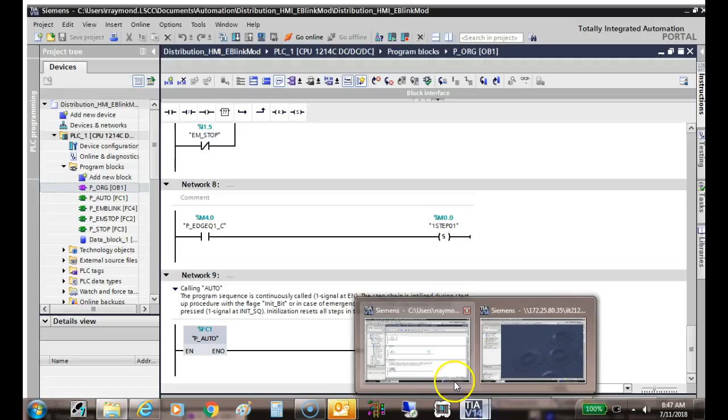So what's neat is, since this type of file has been associated with TIA Portal, all you have to do is go into your folder, find your last one, double click on it, and it'll automatically open TIA Portal for you. And then when it opens up, you can go directly to Program View, and it'll save you a few steps.

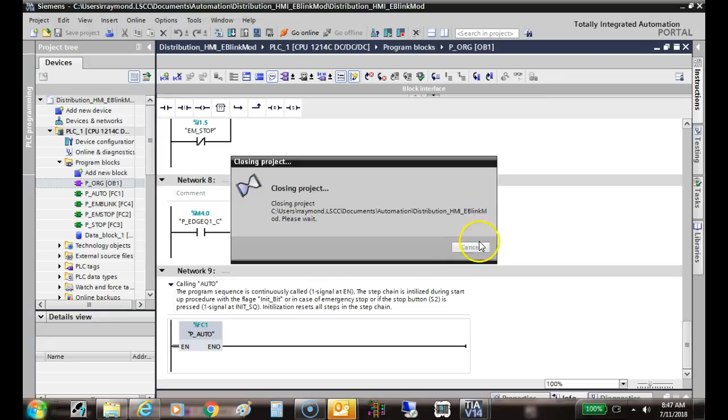What I can do is, of course, close out TIA Portal, try to anyway. So instead of me opening up TIA Portal, what I could do is come out to one of your applications, then double click on one of these folders.

And then right down here at the bottom, this is where you need to have extensions turned on. Now what they'll do most of the time is put the icon for the application that's associated with it. Y'all see this? Okay, the problem is I've got two folders — I've got two files that have the same name. One of them is a program, one of them is just something else out there.

So now I can come over to this one, which is the program, and double click on it — when we say double click, we mean double click the left mouse button. And what it'll do is automatically open up the actual application that's been associated with that file. So all it does is save me a step.

And then when I get here, it's locked, I don't have access to it. When I get here, what it does is I can just go down there to program view and do what? Yeah, portal view, and then we can pull up the application that way. That makes sense. So instead of me coming through here, it's up to you, but I could come up here and open these, but I don't have one that has timers on it.

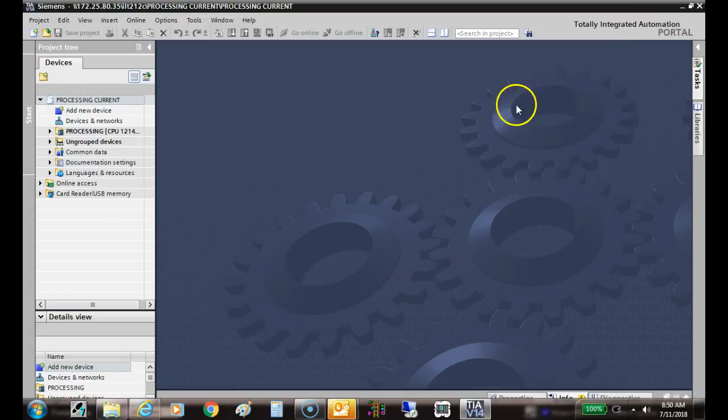So notice one of our... so it loads. Oh, I don't know, it doesn't look like it's doing what I thought it was going to do. I thought it was going to give me the option to open a file, but it's not. For some reason my taskbar won't go down. Sorry, guys.

So I'll just create a new project. We'll call this timers. And we'll also look at counters.

So on the Allen Bradley timer, it automatically gives us two coils out there, right? It gives us — what's the two coils? Anybody remember? Enable and done. We can address the enable — we can address that with timer timing, right? You understand? And then we address the other coil with timer done.

What you know right off the bat on the Siemens is they don't give you all those default coils. So what does that mean? Yeah, you have to assign them, right? You understand? But you don't have to use them. Well, you said you didn't have to use it for, right? On a timer you do, because when you use a timer, now you're thinking about the clock. I'm not talking about the clock, I'm talking about a timer.

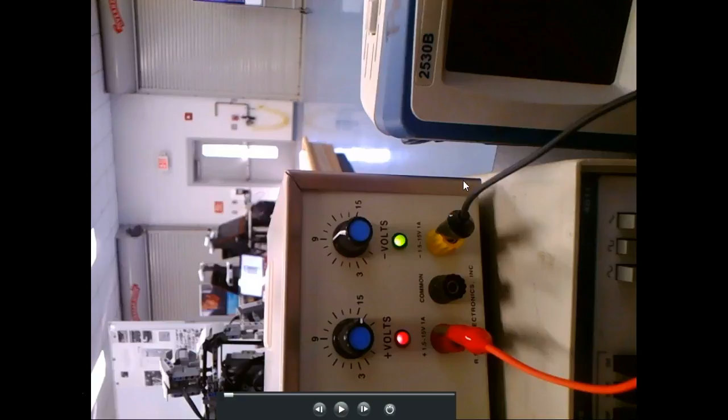Or trying to anyway. So here's something - can y'all see what I'm doing? So I'm going across. This is my positive supply, this is my negative supply. So what I'm doing, I have this one set for 15 volts, I have this one set for 9 volts, which gives me what? 24 volts. Y'all understand?

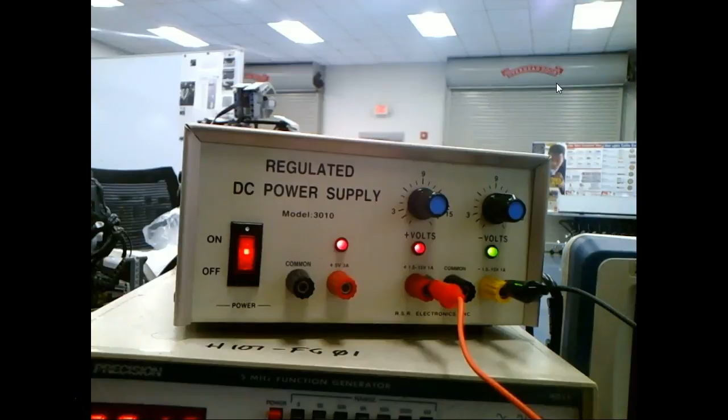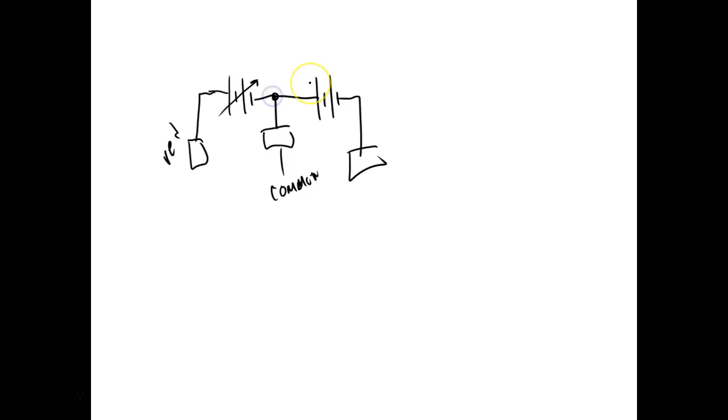So the way the trainer's wired up, if y'all went up when we did this, is the way it's done. So we have a variable power supply right here, and then it comes over here, and this is red, and then it comes over here. It's got a tap right here which they call common, and then over here we've got another power supply pointing this way, and this one is yellow, and this is variable.

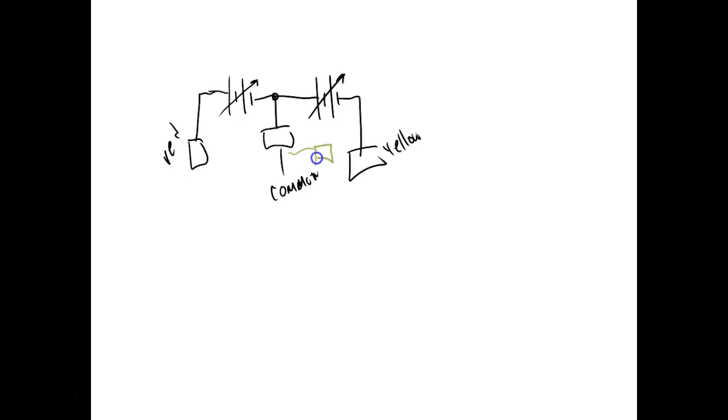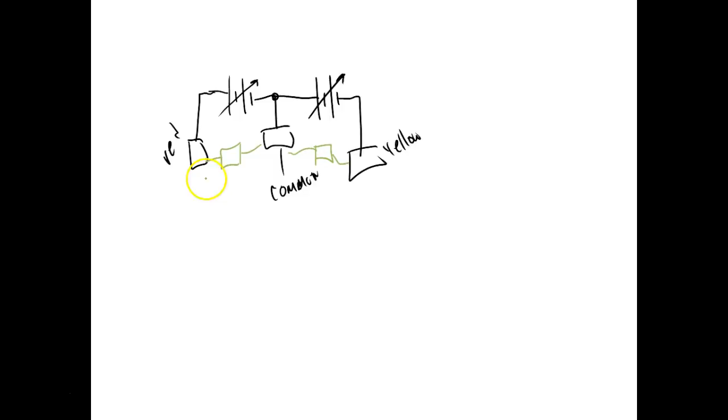So if I make a connection between here and here, then I get a negative power supply. If I make my connection between here and here, then I can adjust this and I have a positive power supply. If I make my connection between here and here, then what we're doing is we've got two power supplies connected up in what we call series. And when we connect power supplies in series, their voltages add together - and you do this all the time.

Your remote controls - very seldom do you see a remote control with one battery, right? So you put them in there... I'm not going to say what we said in the Navy, but anyway, you put them in there positive to negative, and what happens is the voltages do what?

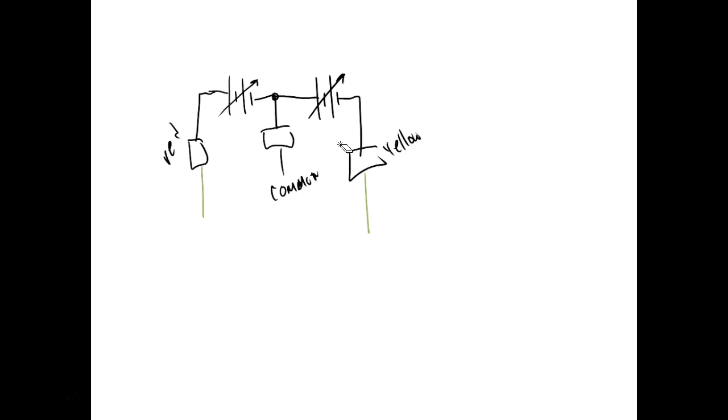They add. So we can hook DC sources, and they have to be the same, guys - if they're different, one's going to get hot and one's not going to get hot. So we can hook DC sources in parallel, and we don't change the voltage - what we do is we double the current. So if this is 50 milliamps and this is 50 milliamps, if I hook them in parallel, I don't change the voltage, I get double the current, right?

So a lot of your remotes will have two sets of batteries - put two in series over here, two in series over here, then they're wired in parallel. So we hook them in series to increase the voltage, then we hook them in parallel to get more current out of the batteries. Does that make sense?

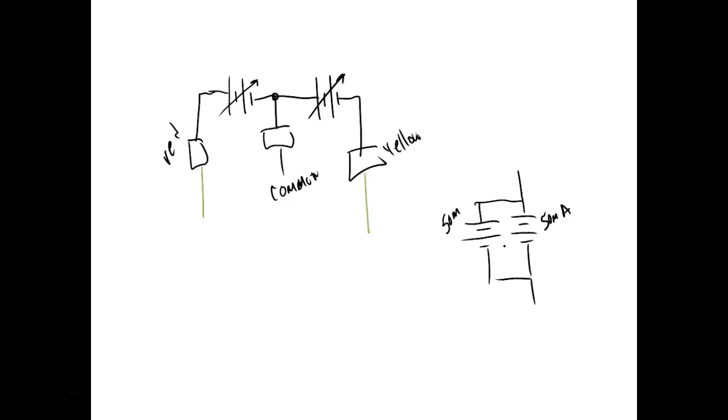So what I'm doing is I'm not using the common, and I have this one set to 15 volts, I have this one set to 9 volts, and it's the sum of the two voltages. So in parallel, you need to make sure the batteries are the same voltage level, because if one battery is 12 volts and one battery is 6 volts, then the 12-volt battery is going to see the 6-volt battery as a load, and it's going to push whatever current through that battery. And that's the way you charge most batteries.

Lead acid batteries are voltage charged batteries. They charge on a current, but what you have to do is force voltage back through them. When you force voltage back through a lead acid battery, it charges. That's why when your car's been sitting overnight, your voltmeter measures close to 12 volts, but when you crank it, it goes up to over 14 volts. Your alternator is pushing current back through that battery, causing it to charge. So with lead acid batteries, we put a higher voltage on them than what we need.

NiCad batteries and lithium batteries, we charge them at a certain current rate. These chargers are really, really small and smart, so they output a certain current. If your battery's dead and you plug it into your charger, it might only start out at 1 volt to get 10 milliamps. But as the battery charges and needs less current, your charger automatically increases the voltage to maintain a constant current. So NiCad and lithium batteries are current charged batteries.

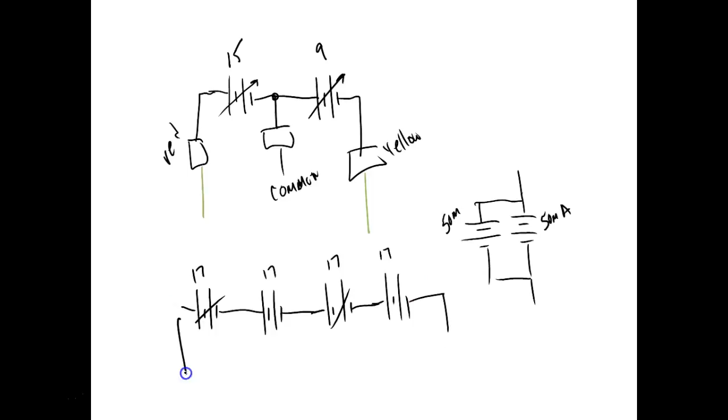This is the way I hooked up mine. We can series string these power supplies. So the other day when we did the counter EMF, all I did was take multiple power supplies and hook them in series, and I didn't even use the common. I would set this at 17 volts, and this at 17 volts, and this at 17 volts, and that at 17 volts. How many volts did I get out here? 4 times 17.

And then, of course, I started adjusting the last one. So we can series string batteries, we can series string power supplies. What's nice about power supplies is if you series string them, the voltage does not have to be the same. The voltages are additive. If you hook them up opposing, the batteries subtract from each other - it doesn't hurt them, they just subtract. That's why if in your remote control you hook one of your batteries in backwards, they subtract from each other and your remote don't work anymore.

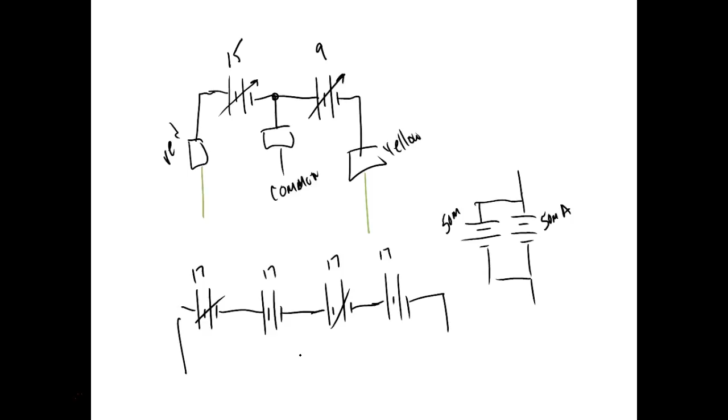So I fired up my PLC. I'm going to hook up this - well, now we can go back to what y'all learned back in DC. Didn't y'all learn series aiding and series opposing sources? You don't realize it, but you see it all the time.

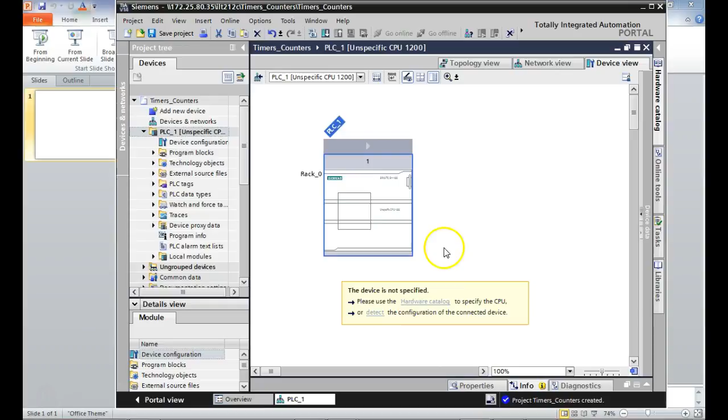So we're going to detect it now. I've got it powered up, it's went through its self-test. Most computers, when you turn them on, go through what we call a power on self-test, a POST. When you turn your PLC on, the lights come flashing and blinking - the processor's going through a self-test to make sure it's ready to take your program. If that red light actually stays on, then you know you got problems.

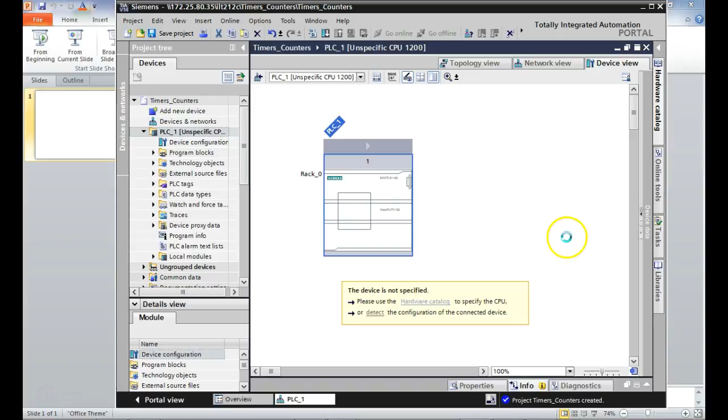If you got some little power supplies - I got tons of computer power supplies at home, I've been through so many computers - and they're all different voltage levels, you can series string them together and get quite a few different voltages out of it. But make sure you go negative to positive, you don't want to go positive to negative. Make sure when you series them, you go negative, positive, and take your outputs out the output negative on this side and output positive.

So I needed a bunch of power supplies to power up the encoder and the motor, so I used a bunch of my computer power supplies. I don't know if y'all noticed when I hooked up everything the other day. And then I used my variable power supply to...

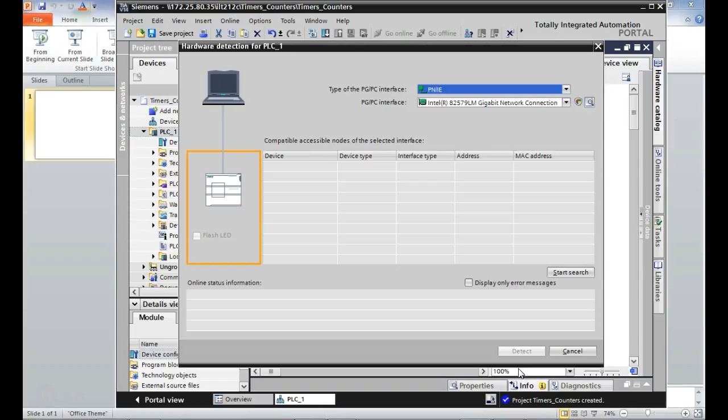There we go. So I'm looking at two lights on my PLC - I got a link light and I got an RX-TX light. What's the link light? It means you're connected, and the other light that flashes, the yellow one, that means we got activity. Okay, so this looks good.

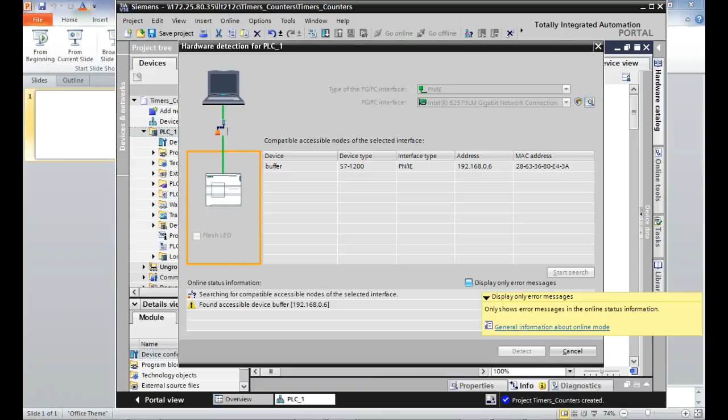So we're waiting on the detect button down here at the bottom. It's got a diffuse sensor on there that's looking for color. So then we could see, okay, it's red, and the red has to be this height. If it's black, it has to be this height right now. So we got some red ones that's the wrong height, but it lets it go through because it's within the span.

What we do is we have a sensor called a diffuse sensor, and the way the diffuse sensor works is that it transmits light, and then what happens when it hits the object, the light reflects back. So what we can do is we know that the amount of light that reflects back depends on the color.

Now, what it does, it depends on reflection. But what you have the ability to do, even on the Lego robots, is you can set what we call the sensitivity. So on the back of these things we have a little set screw that I can turn it so it don't see black. So if it don't see black, the only other two colors we have are red and chrome. Well, red and chrome are highly reflective, right?

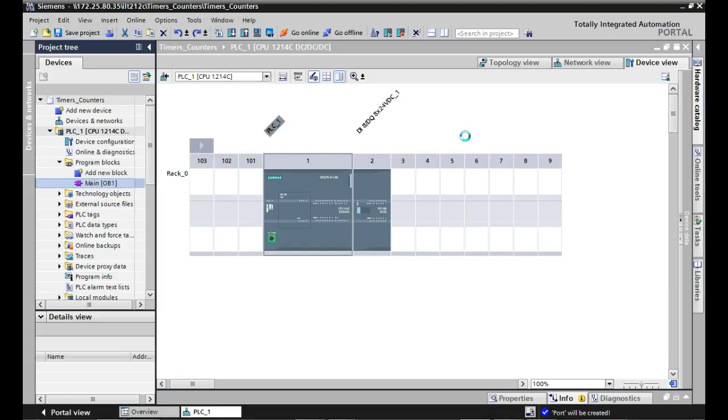So we have two things. We have a metal sensor over there, and it assembles it different ways depending on whether it's metal, whether it's black, or whether it's red, right? Does that make sense? So we'll take y'all over and show y'all those sensors.

And my PLC is taking a long time for some reason.

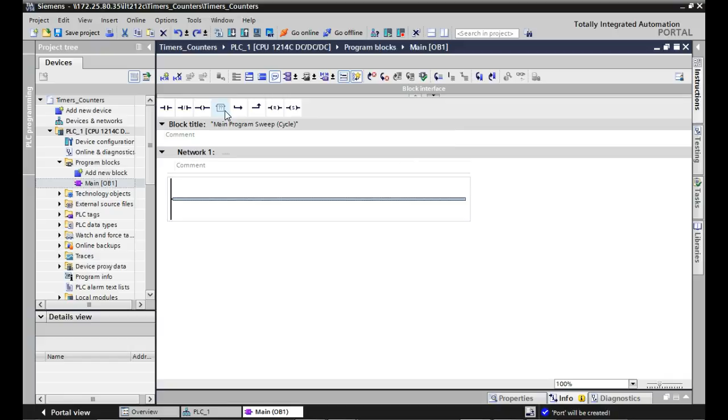So what type of timers do we have? Three types, right? What's the three types? We got on delays, we have off delays, and then retentive, right? Okay, now what's the difference between an on delay and an off delay and a retentive? When you disable the on delay, it automatically resets itself. When you disable the off delay, it automatically resets itself. If you have a retentive timer, when it's disabled, it keeps the time. Okay, and so that would you have to do what? You would have to reset it.

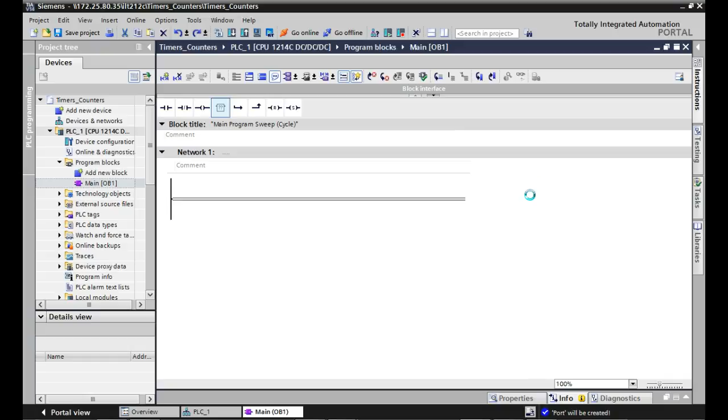So here's our instruction palette over here. But we also can bring one of these down in here, as soon as it's available. So let's look at the instruction palette - that's probably the ones that y'all are going to use most often. And what we're going to do is find our timers, and it should be obvious. So we open up our instruction palette right over here.

So this box I pulled down, this is a box you just specify. I could start out typing T, and then it would bring up just the timers, right? Does that make sense? So I finally figured out what this box was. That box right there with the question mark, then it can be anything.

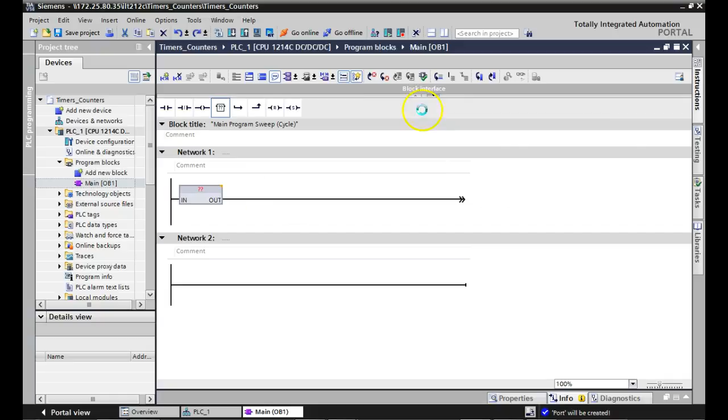It's a lot faster than actually opening it up here. So here's our general bit timer, our timers, and then of course the function block, which is easy to use, and then the coils, which you'd have to use if you were in Step 7. If you actually use S7, which is the version before they came out with version 14 and added everything to one application. Originally it was called S7, the programming software. This is still technically called S7 TIA Portal. This is what we call version 14, the 14th version of Step 7 software. Does that make sense?

So here's our timer. I'll call it TP, T on, T off, and T on R. What's T on R? Yeah, we'd have to look and see what TP is. I don't know what it is.

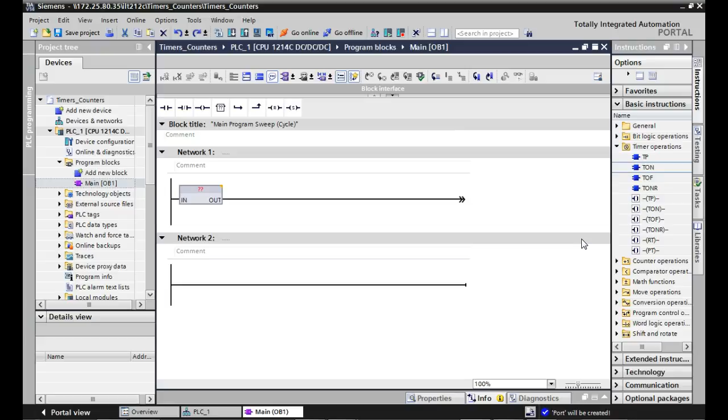So we come over here and pull an on-delay timer in here. What's some of the things it's going to ask us? What do we need to specify? We need to specify the time. We need to figure out how we're going to enable this thing, right? So normally we don't put a timer in a rung without some type of control element in a regular timer.

Now, if it was up here, all I have to do is start typing T, and it's going to pop up just my timer. So what's nice about that is you don't have to figure out which one of these options. This is very similar to RSLogix 500, that scroll bar over there. On 500, you hit the scroll bar, find a category, click on the category, and the instructions available in that category pop up for you.

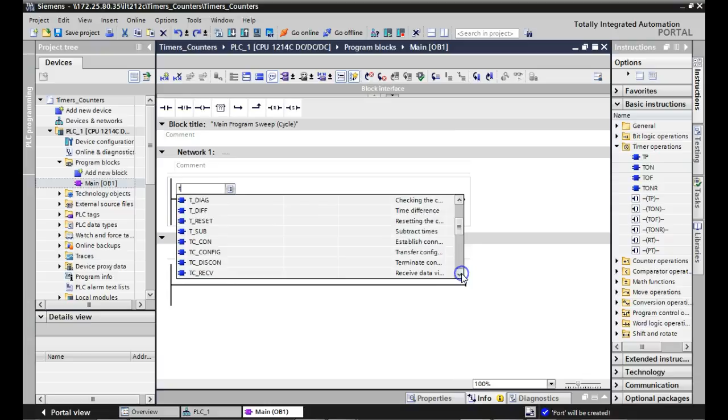No, it didn't do it. Yeah, so here they are, timer on, right? And so let's get rid of this guy and do it the way... dang it. Might let y'all just go ahead and work on your labs, and we'll just take little breaks when this thing pops up, because this is wasting a bunch of time. So y'all go ahead and get y'all's computer out, and I'll just pause this, and we'll just...

All right, guys, so when we insert a timer, by default it creates a data block for us. You'll see that. You need to leave this on automatic, don't do anything there. Everybody okay? Where did you pull that? As soon as I pulled the timer over here, timer on, and moved it into my ladder, as soon as I let go, this box popped up.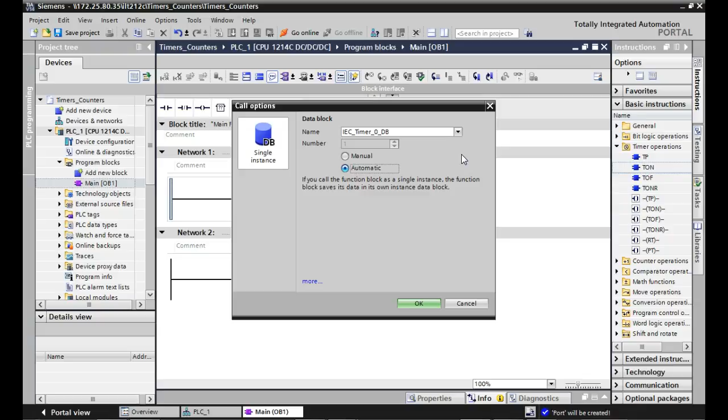Okay, so here's my timer, here's what we got. This is my enable input. So what we would do here is come in and put some type of contact or something in here that would come up and control this timer. Okay, so that's your enable input. This is a regular on-delay timer. So anytime the enable input is true, as soon as the enable input goes false, it resets itself.

And we'll just use the default tags here. It resets, yeah. If you leave it enabled, it'll just sit there when it meets its PT. What's PT? That's our time, our preset time. Milliseconds.

So if I wanted 5 seconds, I would have to come up here and put in 5000. And then we enter that, and it'll come up and tell us milliseconds. It might jump to seconds, let's see if it does. Sometimes it says seconds. So it jumped to what? 5 seconds. Now, if you enter it like this, 5S, then it will give you seconds, by the way.

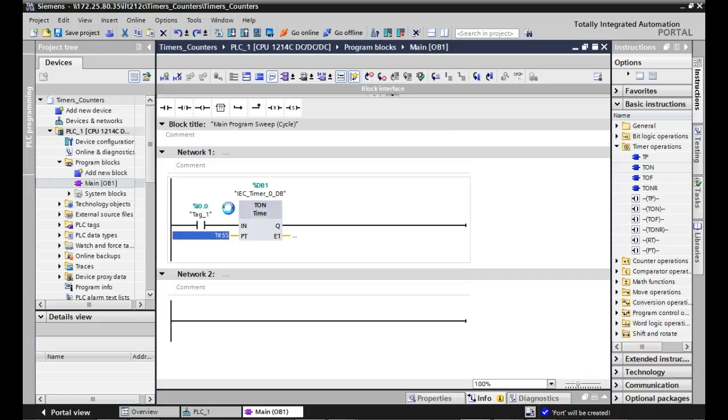If it's red, what does that mean? It's wrong, right? Wrong syntax. Usually if it's the wrong syntax, it'll pop a red box and tell you. What is syntax, by the way? It's the way you write something—the correct way of writing it.

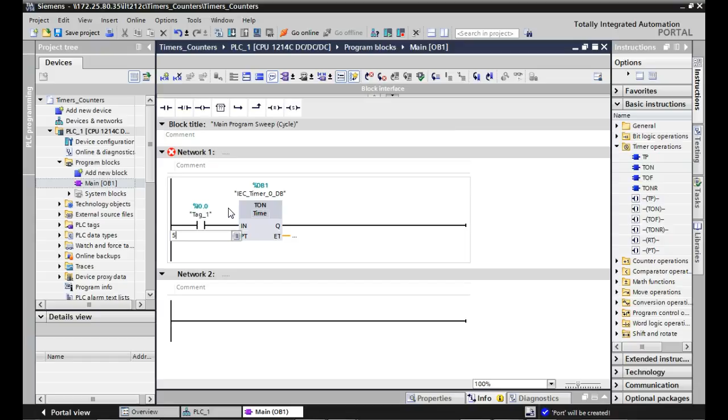So let's do 5S and see if this works. Most people don't tell you this, but they've made some changes in version 13. So if it doesn't turn red, I did it right—that's fine. You type in 5S, and that gives you 5 seconds. So it's blue—blue is good. Blue means that it's a constant, right? You understand that?

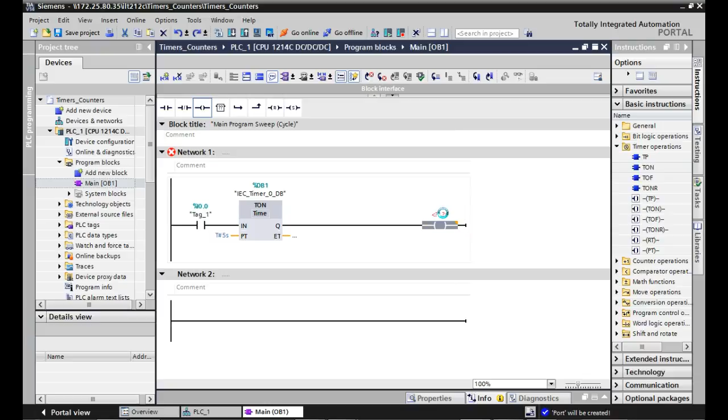Then we've got the Q output. This is our timed output. So what do we have to put out here? This is where we'd put our coil. It could either be a memory contact or an actual output. Does that make sense?

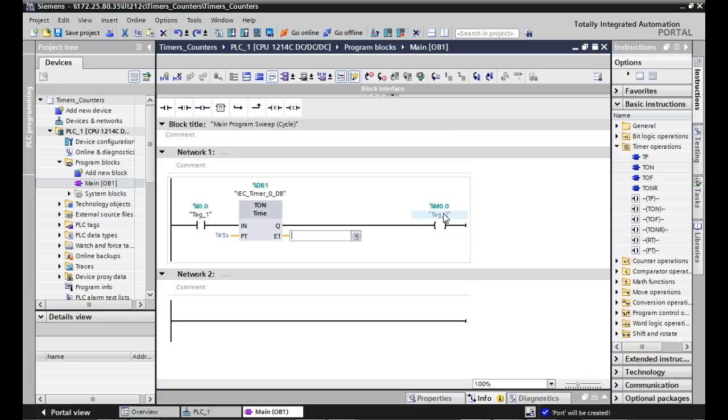So I could put M0.0 and that assigns it to a memory coil. It's going to automatically give it a tag, and I can go back and change that tag. Elapsed time—this is the timer timing. You don't have to use that.

What this will do is come up here and show y'all—I needed to get some of the little I/O switches in here. When we energize this, your timer would actually show you the elapsed time over there. Now what you can do is assign that to a memory address, and then—I think you can address it directly, I'll have to look at that. So there's a timer. Everybody okay?

Now a counter—here are our counters. We have high-speed counters; those are hardware counters, right? We looked at those the other day. We're not going to use high-speed counters if we're just going to count things. If we're counting extremely high-speed things, then we'll have to use a high-speed counter. High-speed counters are hardware.

So I go to counter, and these are the counters we have. What counters does RSLogix 500 have? Count up, count down—this one's got quite a few options, one of which I don't know how to use. But even though I learned on the Square D, moved up to this, and played around with Modicon PLCs, what I found out is they're basically all the same. Once you learn one, it makes it easy to pick up on another, because they basically program in ladder. If you saw programs in a different language, it would be kind of hard for us.

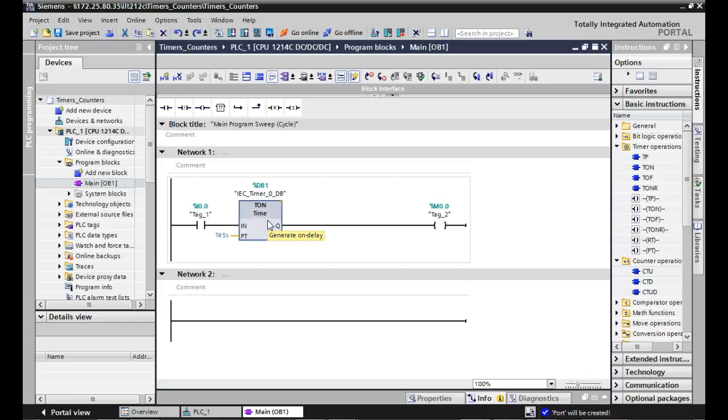So we can bring our counter in here, and if we don't know the block, what can we do? We can click on it, highlight it, and press F1, and it'll bring up the manual showing us what each of these inputs and outputs do for us. Click on it and highlight it, then hit F1 on the keyboard—that's a standard Windows key for information, by the way, works in just about any Microsoft application. It'll bring up an information block that should show us what's required for that instruction.

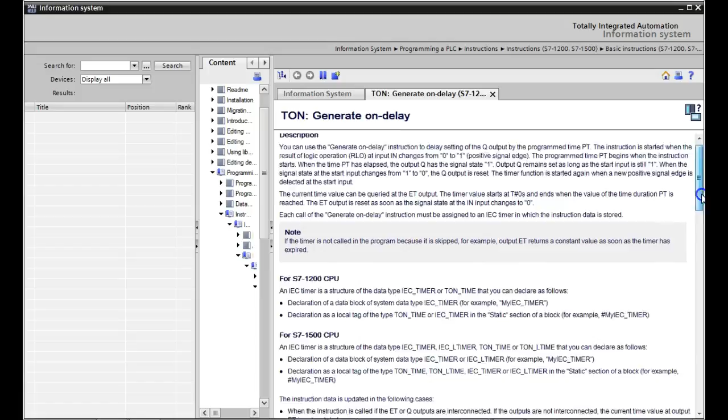And see? And then we can come down here and it says, okay, IN, this is the start input. PT, this is the duration of the time delay. Q, this is the output that is set when the time has expired. ET, this is the current time.

So now I know what each one of these mnemonics or abbreviations on the inputs and outputs of these function blocks do for us, right? This tells us we could use an input, we could use a Q output, we could use a memory, we could use a double word, or we could use a long word.

I don't know why we have those. Down here, PT, we can use all these, or we can use a constant, right? And what's a constant?

In PLCs, there's very few constants. In a computer, or a PLC, a constant is, you have to change the program to change the number, right? You understand? A variable is something you can change on the fly. Yeah, you can change it.

So the output of my counter would be a variable because it constantly changes. My preset time, I could get that, probably not from an input. We could get it from an input word, right? You understand that? But it doesn't change.

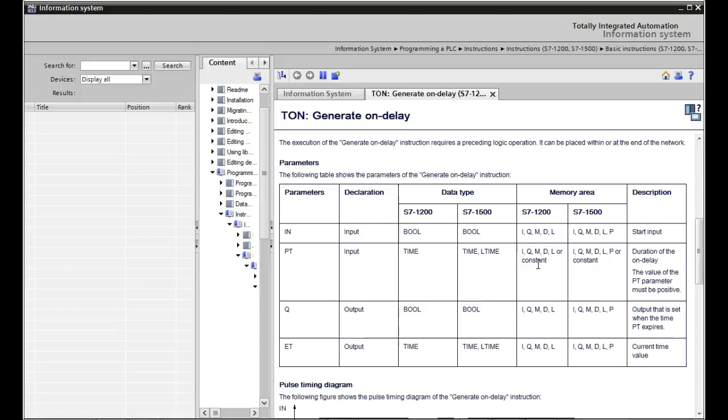So I'd have to go in and change the program. I'd actually have to literally go in there and change the program. And so that's what it's showing me. This right here, this blue, it means it's a number, but it's a constant. But I don't have to get it from a constant. I can get it from a memory location, right? You understand?

Don't know. That's news to me. I'd have to say that.

Yeah, and what's neat about Siemens that's a lot different than what Allen Bradley does - the only thing I remember Allen Bradley gives you the ability to do is right clicking on the contact and changing it from an examine open to an examine closed, right? Understand? But if I come over here and click on that, y'all see the little red arrow up in the corner? That means I can come up here and click on that, and it's going to give me all these different options of what we could do.

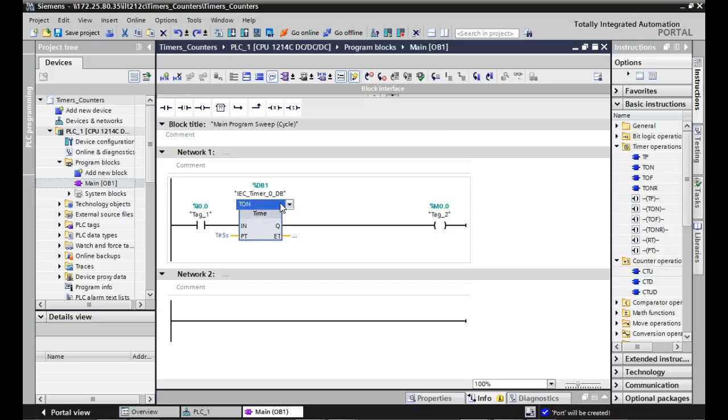So instead of having to type in that - even up here, if I click on this once it stops, it's going to give me a text box, and I can change it to an off delay timer. I can change it to an on delay timer. Y'all understand that? Without having to do what - on the 500, we'd have had to delete it and then bring the new function block in there, right?

Are we okay? So we'll use the up counter. So this is an up counter. It's going to assign a data block for me. It's automatically given it... 2. So basically, we leave that automatic.

Or now, if I come up here, then I'm concerned with colliding with this thing, right? You understand? So if I assign both of them to 2, it's not going to give me an error. It's just that my timer now would affect my counter, right? You understand? So basically, we usually leave this on automatic.

If I want to give it a name, by default it's given it the name IEC counter, but I could call it like Part In or something like that. And then once I do that, now the counters make sense, right? You understand?

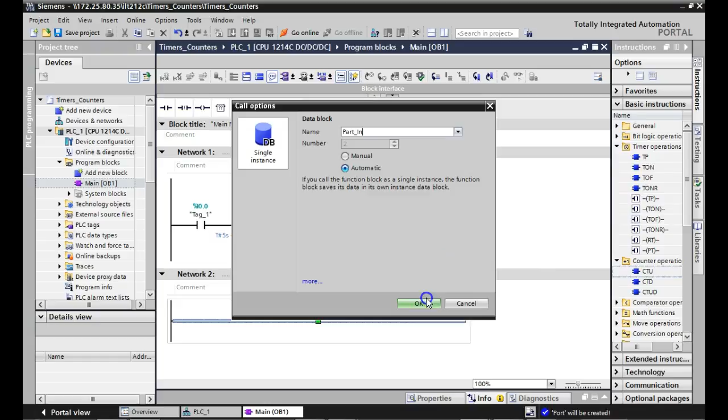So this is what we would do, kind of like - notice it calls my counter Part In. Up here it gave you that default name, right? You understand?

So you can actually assign that timer - on your program, just about every one of your timers have a comment up there. But what you could do now is give the timer the name of the contact. I'm sorry, not of your tag, of your comments, right? That makes sense.

So what do we need here? So we got an R. By default, it says... false. If this is red, and you just look for what?

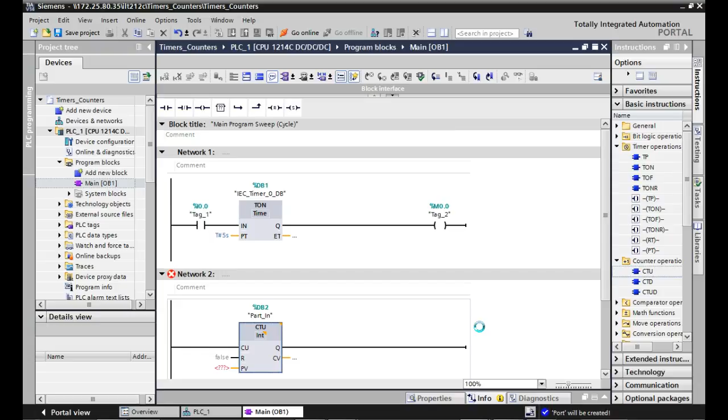Good, this would be our what? Preset value. So most of these we can figure out. This would be your counter done, right? Understand, Q? And then this right here, this would be our current count value.

So if I can assign it to memory, if I leave it alone, the value will pop up there if you have it in monitor mode. The actual count value will pop up there, or I can assign it to memory, right? You understand? So what we need to do is figure out what this R means.

So how do I know that? I'm going to click on it and do what? Highlight it, hit F1. Then I can come down through here and find the chart. And so what's R?

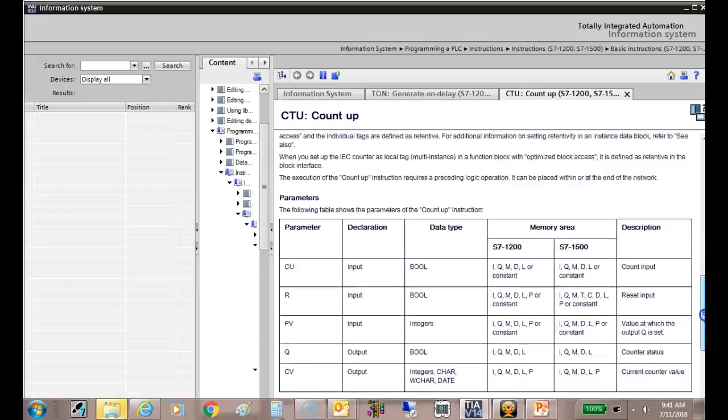Reset. So the Allen-Bradley counters reset? No, they don't. We have to reset that. We have a reset instruction, right? Here what we could do is we can just assign that to an input and use that to reset, right? So there's the reset on our counter. Most of y'all figured it out.

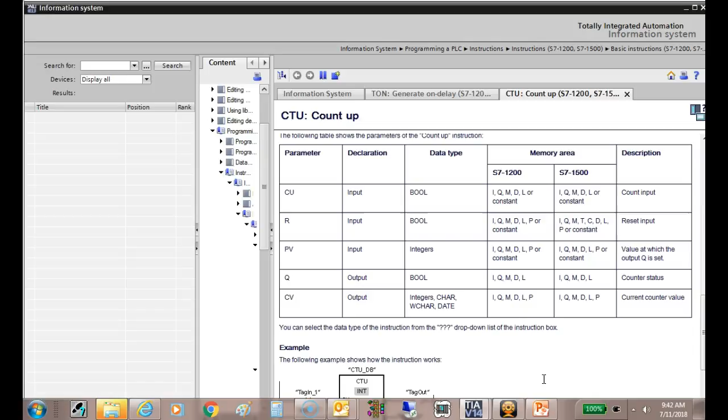So CU, this is what we're counting. R is what? Reset. PV is what? This is our preset value. Q is our what? Counter status. Or CV is the current what? Current value. So our status would be.

So what we would do, the current value is, it would show you. And what I said is what happens is it'll pop up above. It's really, really neat.

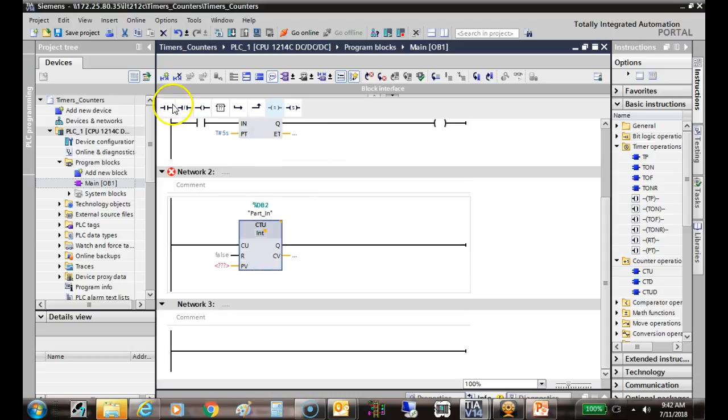So what we need to do is right now it's false. What would we need to do? We need to put a contact in here, and this would be what we're counting, right? Everybody okay?

Then we would need to come over here and put a contact right here. And then this would be - oh, guess what I did? I used an O instead of a 0. I'm sure y'all have never done that, right? Well, I'm using 0 right there. Let's don't use 0 here.

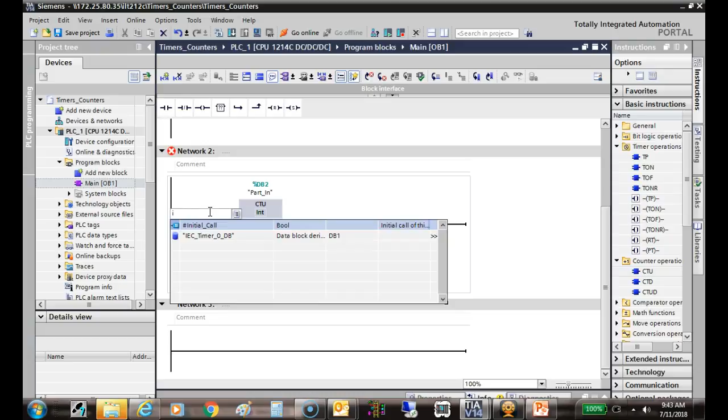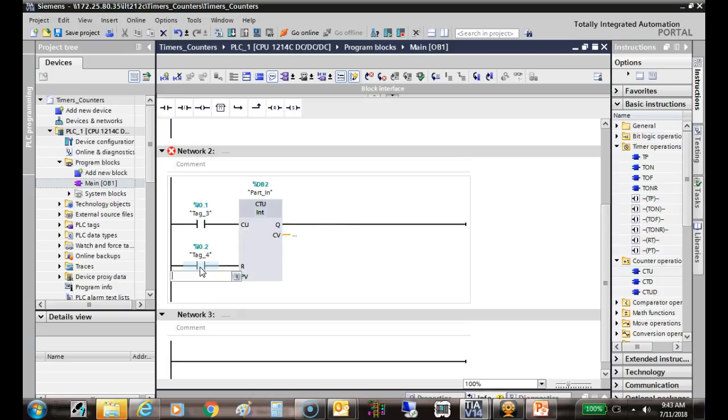Hit it again. It's not in parallel. If it was in parallel, this side would be connected to that side. It's not in parallel. This is my count, this is my reset, this is my preset value. So if I wanted it to count to 100, I would put that right there, right? That makes sense?

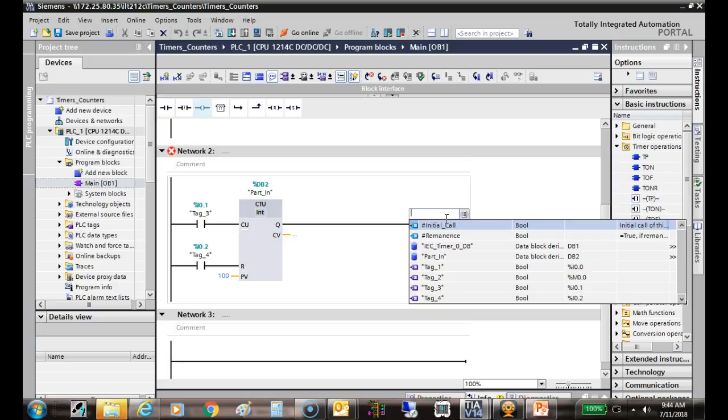And then I would come up here, and this would be what I want to do when the timer resets. So I might here assign this to an output. That makes sense? Pretty straightforward. The only thing that's really different is that on the 500, we use a reset coil. Here we don't use a reset coil. We reset it at the counter.

This is our count up, and this would be our counter down. Are we okay? This will show us our what? Current value. We don't have to assign that to anything, but I could put that in a memory location and then use that somewhere else, right? You understand? That makes sense? So you can't get access to this guy, you have to simulate this.

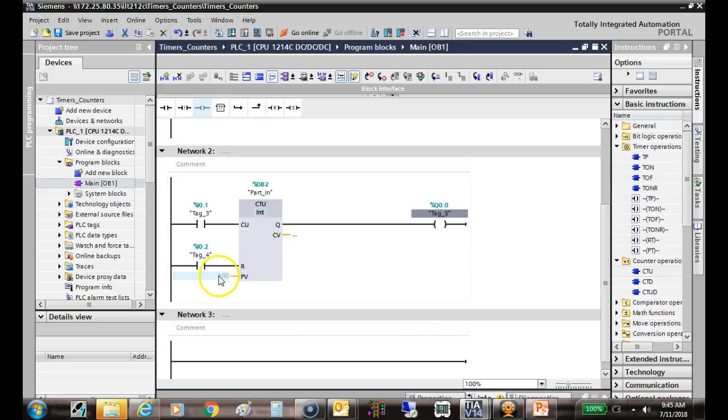This is not a timer. This is a counter, I'm sorry. On my timer, I set this for 5 seconds. On my counter, I'm counting up to 100. I was thinking timers.

By the way, what happens when it hits 100? This guy goes true, but what if I get one more count? No. I don't remember, it's just like the Allen-Bradley. If you don't reset it, it just keeps counting. It goes true when you match the count, but it stays true when you match it or exceed it, right?

You understand? It's just like the 500, and we would like it to do that because we might not want to lose counts, right? That would be awful if I was counting and for some reason I let counts get through and my counter just stopped counting. So these counters don't stop counting, it just gives you a true on the output when this matches this. But if I go to 100, this is still true. 101 is still true. It's going to keep counting until we reset. Everybody okay?

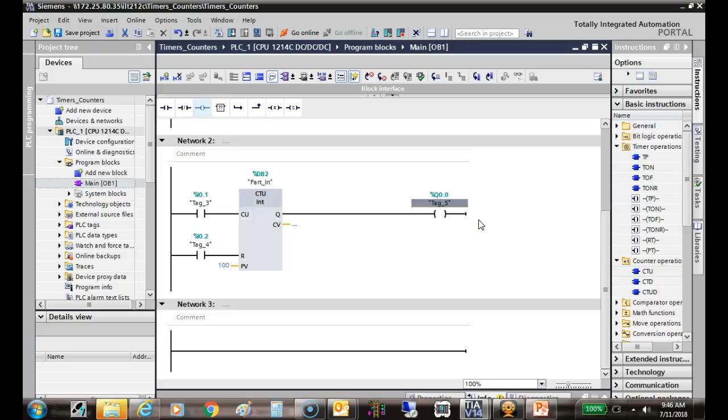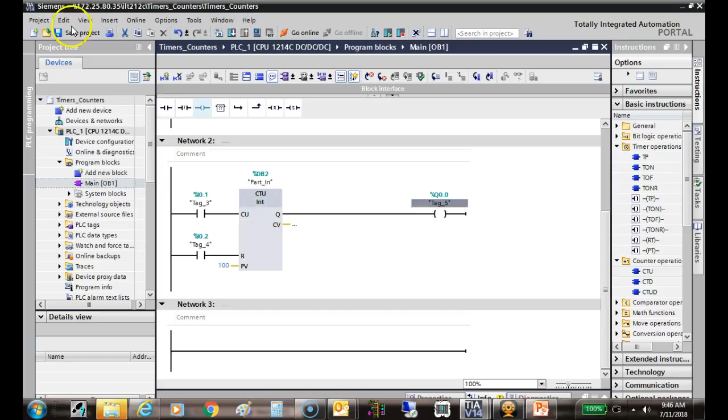So I'm going to get one of the little data switches, the little switches on here. We'll run this. All right guys, are you okay? So we look - this is where you could put it in a memory if you wanted to, but the elapsed time is actually right up there. And it counts as milliseconds. You see that?

Okay, and of course anytime I disable the timer, it automatically resets. Okay?

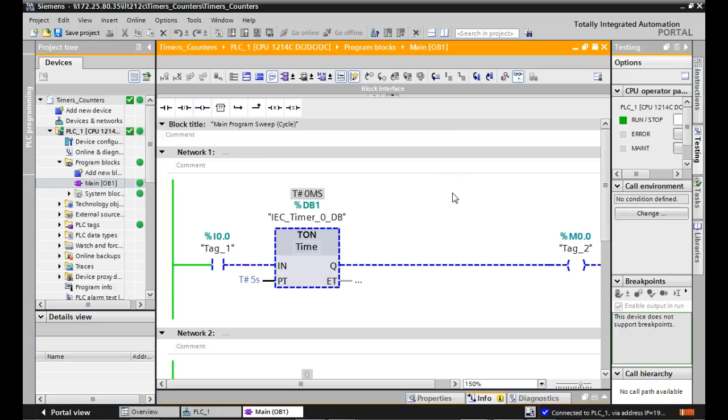And now on my counter, I'm using switch 1 to count. You can see up at the top where it's counting, yes? This shows me the value. It doesn't show me the current value right here, but this is what you would use if you wanted to store the current value somewhere or use it to compare it to something.

And then I'm going to come up here. I don't know why I put 100, guys. But here, supposedly when it counts up to 100, it should keep counting. This rung right here should go true when it hits 100.

Wait a second, I'm doing something. I'm recording something.

So here's 100. Now notice it went true, but the counter keeps counting. It doesn't reset - counters don't reset when they hit their maximum value. They do not reset, they just keep counting. But it shows me that it's always finished counting.

Well, yes, you could do it. You could use the output, you could use this coil right here, and you could make it automatically reset every time it got up to the count. It won't loop it, it would just reset when it got up to the count.

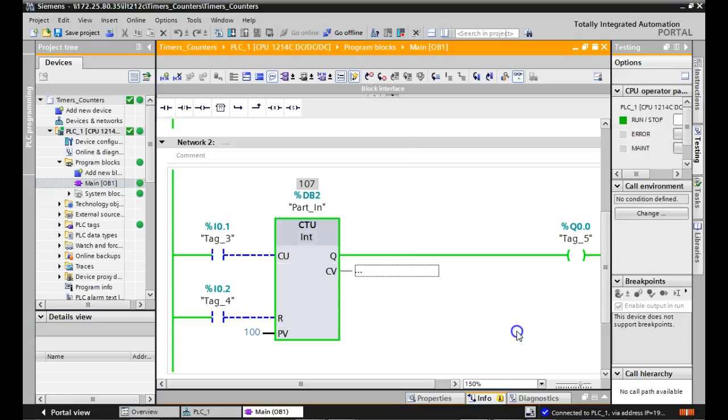Well, if it's going to be a true output, before I make any changes, I have to go offline, right? And then I could come up here, and instead of using... so here I'm using a true output, I can just come over here and delete this.

And then I can give it a tag and use tag 5. So now, when this goes true, it's going to generate an output on my output, but that's also where we can use that, right? Let me come down here and change this to a smaller value.

And I could come up here and take this, and then assign it to memory if I'm using any memory. Now this is where right now it's using setup count. So counters only count what? INT.

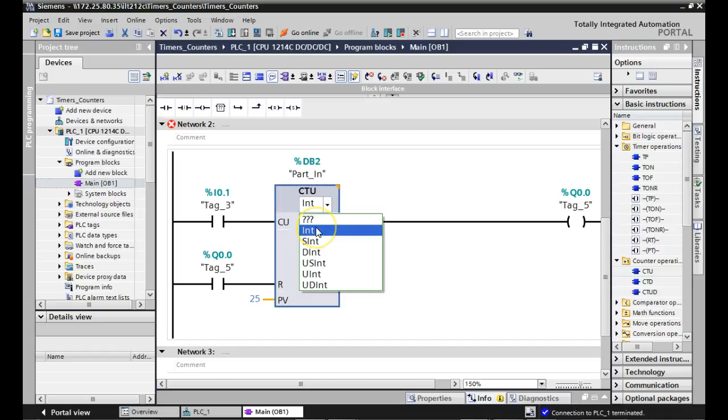But we have an integer, right? And then we've got a signed integer. We've got a D integer. What's D integer? Double. So an integer would be probably a word, right? This would be a double word, which would be 32 bits, right?

This right here would be an unsigned integer. This would be unsigned, right? So that's the options we've got. By default it chooses something for you. But if I wanted to make this signed, then I would come up here and choose that, right?

And then if I wanted to really count some big numbers, I would come up here and do what? This is a sign, this would be a signed integer. This right here, and this is up on the website by the way, this is an unsigned double integer. That's a sure enough big number that we could count to, right?

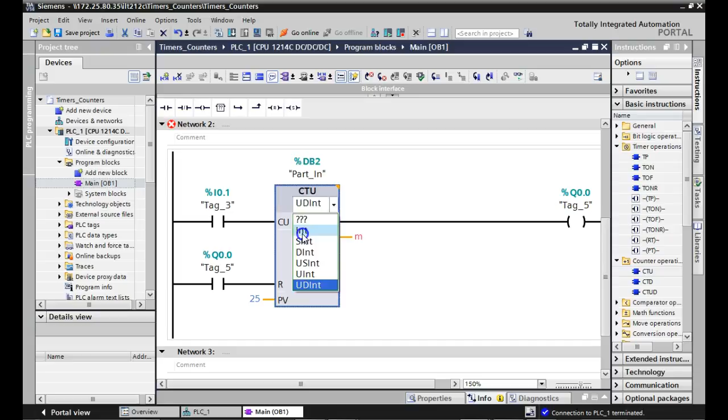Are we okay? It makes sense. Since I'm only counting to 25, just using an integer will be okay, right? Now, what we've got up on the Blackboard site is I want to make sure that I put these up there. These different things, because it's kind of different.

Because on the 500, you decide what you're using depending on what data file you put it in. So if you put it in F8, then it's a real number. If you put it in N7, then it's considered to be an integer, right? Y'all understand that?

But what we've done, and what's so neat, is that y'all have access to y'all's Blackboard sites even after you graduate. So as long as Blackboard runs, you have access to your Blackboard site.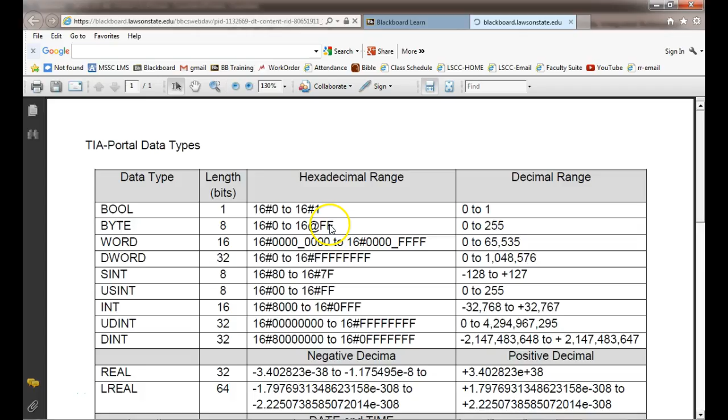So what I've done is, inside your class, I've come over here under reference material, generic recipe material. Hopefully we got data types in here. Data types. So this tells us what the data types are, and these tell us what ranges we have.

So an integer would be a 16-bit number, right? But this is signed. So what we do with 16 bits, we get 65,536 combinations, but we're sacrificing half of them for the signed bit, right?

So over here it says I have a range between negative 32,768 up to a positive 32,767. Why do we have one more negative than positive? Zero eats up one of your positive combinations, right? If I specify an unsigned integer, then we get the entire 16 bits.

I'm sorry, if we use unsigned double integer, then we get - by the way, this is the way Siemens says that's a hexadecimal number, it puts 16 and puts a hashtag out there. So if it pops up and you see that 16 with a hashtag, those numbers are showing you're in what base? Hex.

So this is an unsigned double integer, then this is the range we get. We can get 0 to 4 billion, right? What am I at? 4,294,967,295. That should take care of almost anything we got.

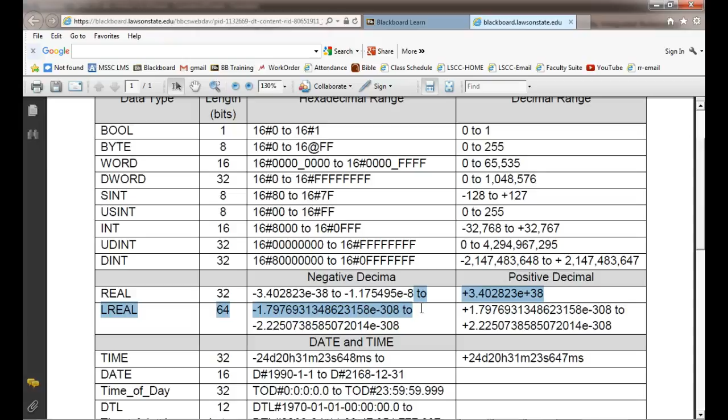So the signed numbers would be from 8, 0, 0, 0, 0, 0. You use something called two's complement. Another thing we have on there is these data type symbols.

So this is what you would do to address these things. If I use I, that's going to be a bit, right? If I use IB, it's going to input a whole 8-bit - it's going to input 8 inputs at the same time. If I use IW, it's going to input a whole 16 bits, right? If I use ID, it's going to be a double word, which is a 64-bit. I need to check that because that looks wrong.

Q would be a bit. Q is an output, but we can update one output at a time. If I use QB, I'm updating 8 at a time, right? You understand that? So that's what y'all are using.

So when y'all clear out your outputs, you're using QW, and then you're saying 0. Well, QW is a whole word, so you're actually clearing out 16 outputs. We don't have 16 outputs, but we have over 8, right? So we're clearing out bits that we don't even have. That makes sense? QD would be a double word. I need to come back and check this.

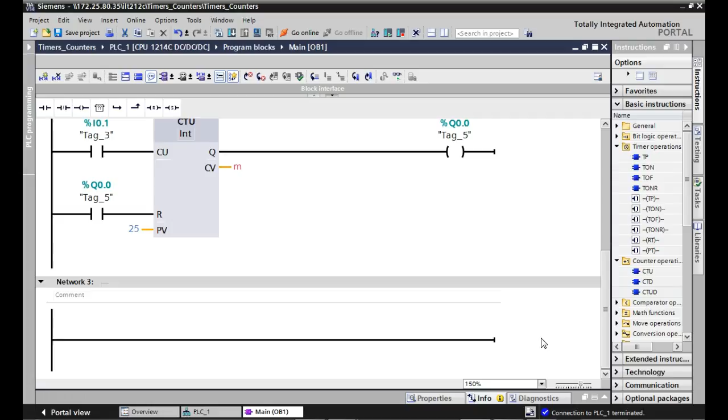It'll bring up the same page for you. So here you can actually look and see what's required or what the thing does before you insert it into a program, and hit F1, right? Y'all understand that? Which is pretty neat.

Okay, that's it. Okay, y'all listening? So this is the up-down counter, which we don't have available in the RS Logix 500. We don't have it available in the RS Logix 500, but the 5000, well, we're going to start looking at that too. But I have a preset value.

So here my preset value, I'm putting what? 25, right? And so what happens is now I can come up here and I'm using switch 3. Okay, and what is it doing? It's counting up, right? Everybody okay? And it'll keep counting up until it hits my what? My preset value. And then it just keeps going. And then if I hit count down, it starts counting down.

And when it gets below the preset value, it should go back to false. Everybody okay? And then of course I can come over here and I can reset it. With switch 5. And it resets it to 0. This one, by the way, comes up to be false. What's that say at the bottom? This one comes up to be false.

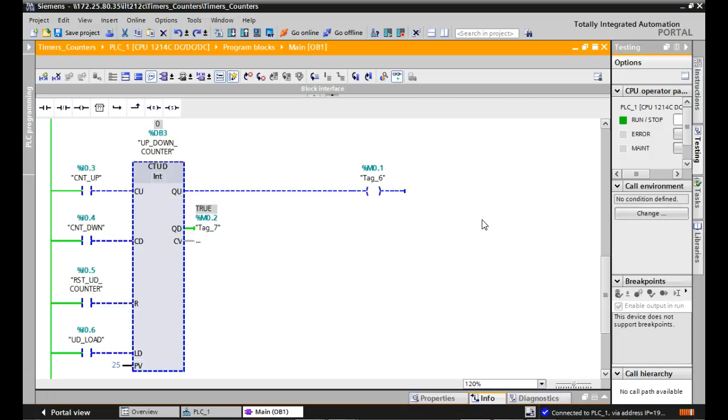So I brought a contact in here. This is load. Now what do you think it's going to load it with? Preset value. So what we're saying is if I use this, then I could load it, right? So I'm going to hit load. By default, this comes up to be false, which means you're not using load. But if I come over here and use the load, then it loads it with whatever you put in the preset value.

So now if it stays true, I know I'm above the preset value. If it goes false, I know it's below. Now I can make decisions with this guy right here. So if I assign CV, which is the current value, I can store that in a memory location, and then I can use my compare operation to say if it's equal to this, do this, and if it's equal to this, do that, right? Do you understand? Yes or no?

So this CV value, the CV value on the counter and the timer is like the accumulator on the 500. So if you wanted to use the accumulated value, you'd say T4:0.ACC right over here. What we would do is we can either use it or not use it, I can assign the CV value to a memory location. And then I can say, okay, if the contents of that memory location is greater than this, I can make it do one thing. If it's less than this, so I could use my compare instructions like we did in PLC2. You understand?

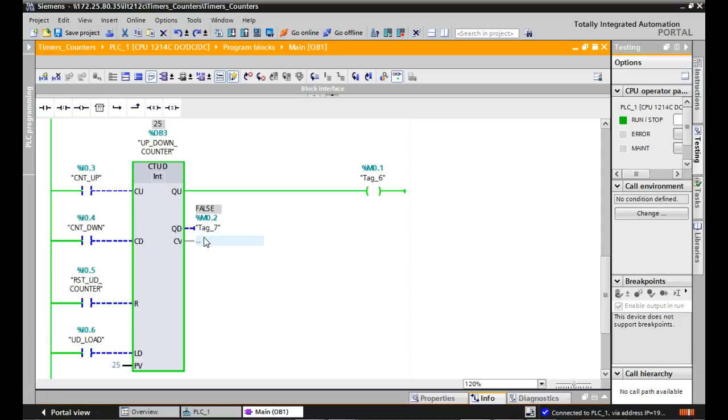So if we don't need the CV value, we just leave it blank. Are we okay? That makes sense? Okay. So that's the up-down counter. It's pretty cool.

So you don't have that in Allen Bradley? Well, we don't have it in 500. So all the PLCs that program with the RS Logix 500 language don't have an up-down counter. But we can simulate it by having an up counter and a down counter. You listening, Jobert? And then using a math instruction to add them together. Then if it goes minus, it actually would add a minus number and it would do subtraction. So we could simulate it. We could do the same thing with two different instructions. That makes sense?

Now the 5000, the RS Logix 5000, it wouldn't surprise me if it didn't have an up-down counter, because that's the newest version that they have out there. But it doesn't program any of the PLCs we have over there. It starts with the CompactLogix. So all we got is the MicroLogix. So you think you got to swap out all the PLCs over here to run the new program?

Right. To program a PLC, we would have, but what we're looking at is trying to get these things right here. And then what we can do is we can put whatever PLC we want on them and use the switches just like you do on the 504s over there. So we can teach PLCs on one of these, no matter what PLC it is.